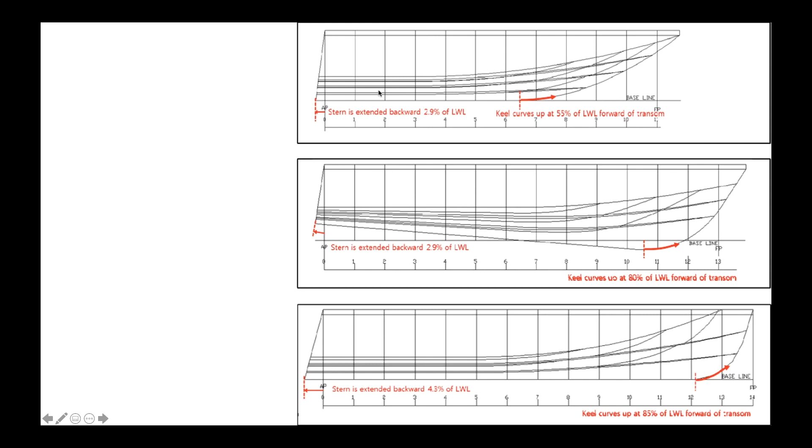Pictures like this are really inspiring, but not very helpful for our modelling purposes. Your typical hull shapes: displacement, semi-displacement, and planing hull. That's what I'm going for. This reference picture, the resolution isn't high enough, I don't think. You could use it, but there's also no front pictures.

This, I think, works really well. You've got a good perspective picture to give you a good idea of what's supposed to be going on. Good image from the front. These red lines here show what your bulkhead shape should be as it tapers along. Good view from the side and from the bottom. I'm not going to use this because I don't really want this continuously tapering line.

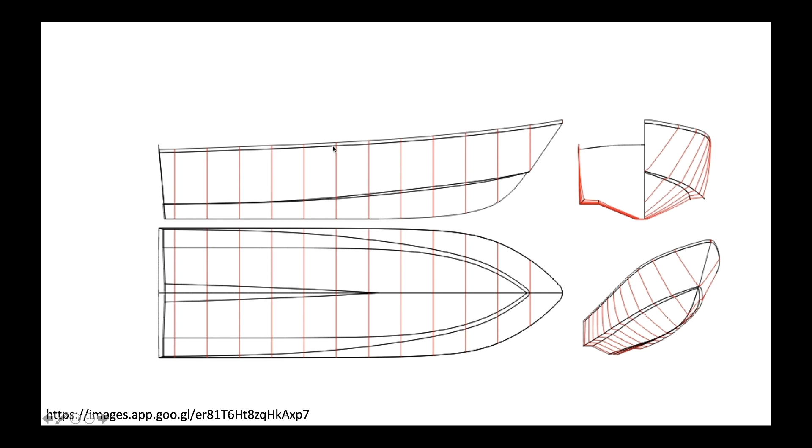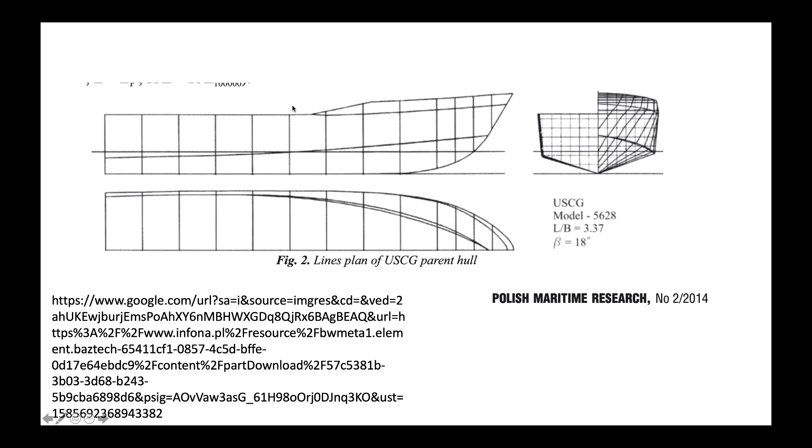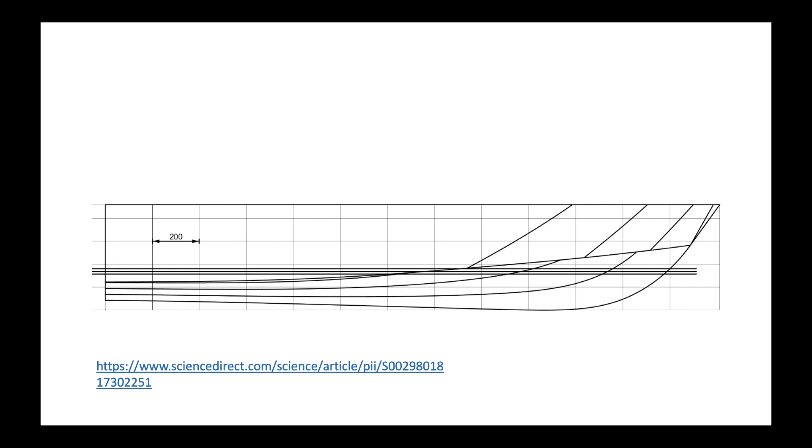So I'm going to use this view from the front and this view from the side. And you can see the link where I got these images from. This one is, I think, a White Pointer, but I'm not certain. I mainly had this for outboard positioning and for the hard top. The hard top is this cabin part up here. The rail on the side is also quite useful.

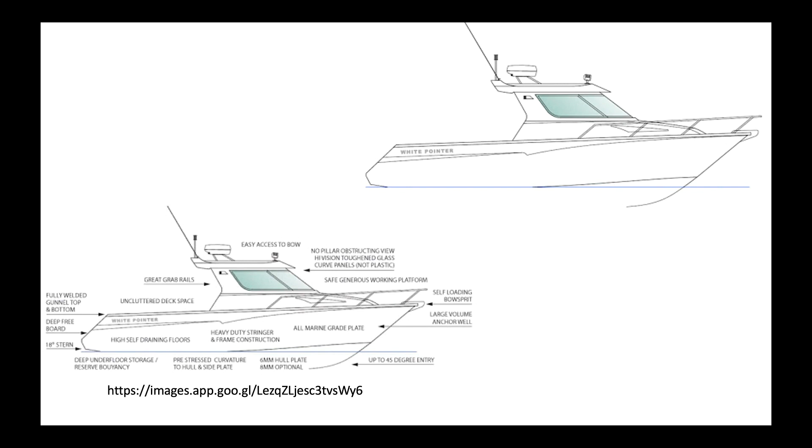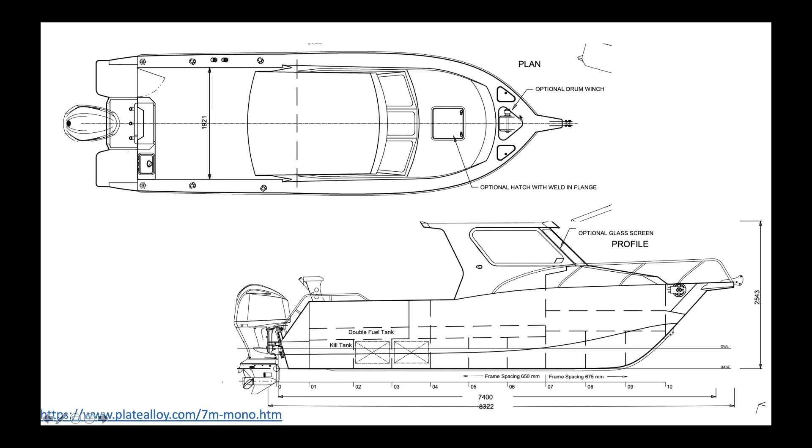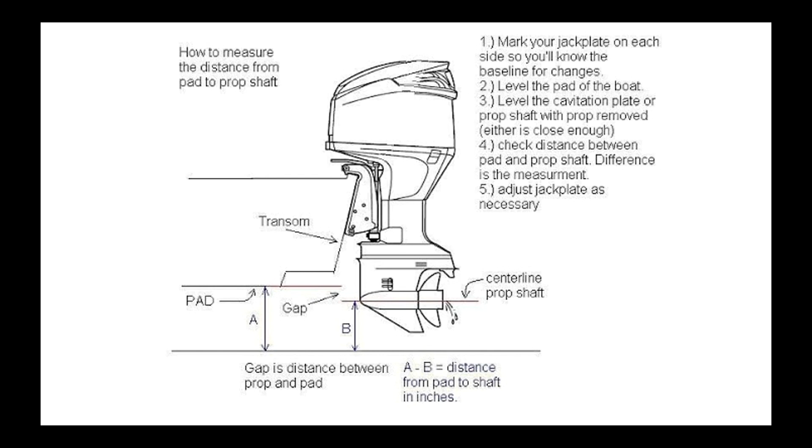This profile is more of a real outboard that I could model. They're quite challenging to get good topology, but I'll do my best a little later on. I found some pretty good images of some Yamaha motors, so that's why I've got Yamaha. No particular preference, they just happen to have good images.

So you've got to start by setting yourself up some decent folders. I've got one for documents, that's my PowerPoint that I showed reference pictures. These are my original models from my practice. Just make sure that you keep increasing the version number on the end, so you can keep track of everything. This is the folder where I'm going to save my models for the video so they don't get confused. Some reference pictures, and these are the reference pictures I'll be using for the boat that I'm making and the video recording. Here are some of my tracks so far.

So start off by getting rid of your default cube, and we're going to insert some reference pictures. Now I'm going to click over here, and what I want you to look at is the view. So that's right orthographic. If I click the Y axis, that's back orthographic, and left. I'm really looking for the front orthographic there, so the letter Y pointing at you. The 3D cursor is in the origin. Actually, it'd be quite sensible if I turned on my screencast keys. So down here you can see what I pushed last.

So if I go Shift A, you can now see what I pushed, and I'm going to come down to empty image. This image is sitting flat, almost like a piece of paper on a table pointing up to the ceiling, and this empty I'm going to rotate. So down the bottom here, if I have not modified anything, then I can just align it to my view. Next thing to do with this empty, if we come over to the properties panel, this green axis here is the empty. So I'm going to click open and navigate to my reference pictures for the video, but I want this front view here.

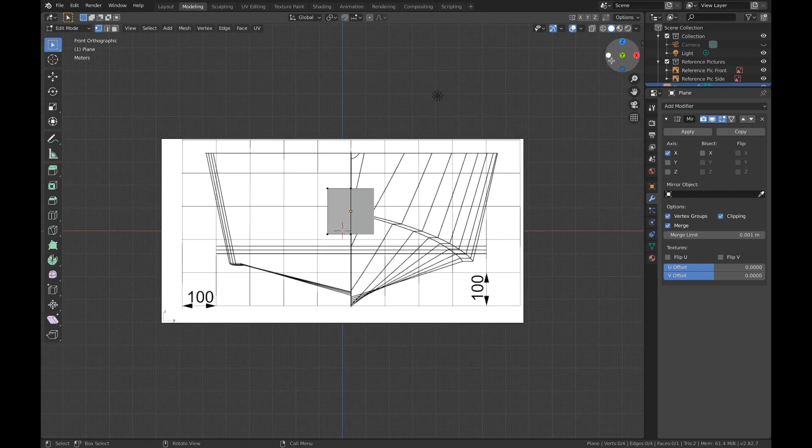I'm going to turn clipping on before I forget. Clipping means that I can't pull it apart like you just saw me do. So I'm going to grab that top section, modeling. I'm going to go into modeling. Seems to be bugging me slightly. So G, Z, pull that up to the top.

Grabbing this vertex here on the left, I'm going to go G, X, and that means that it's going to move out to the side. Now, I'm not certain, but I believe the transom is a little narrower and then it bulges out slightly, so this is the first point. So I'm going to double tap A.

Looks like my screencast keys have turned off. There they are, they're back again now. So I'm going to grab that vertex and grab it and pull it down. So if you see this line, I'm going to bring it down, down, down, and then eventually drop it there.

Now this one, I'm going to pull down to here, but what we can tell is I need a cut here. So I'm going to subdivide that, but I really would like to see through. So if we look up the top here, if I click this one here, if I hover over it, it says toggle X-ray. That means I can see through, which is really helpful for me.

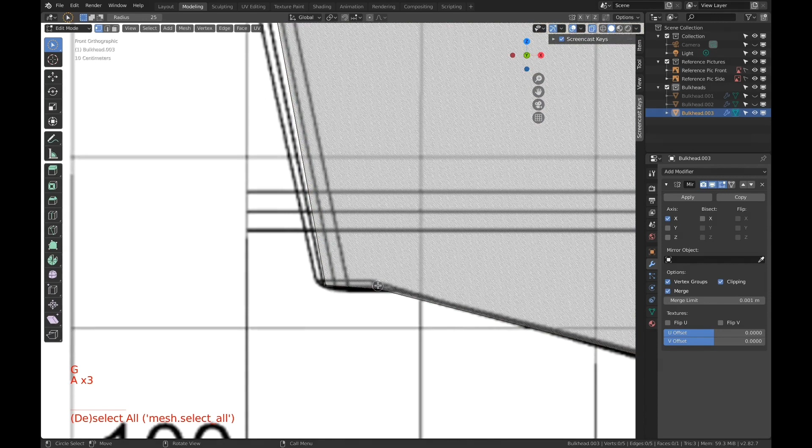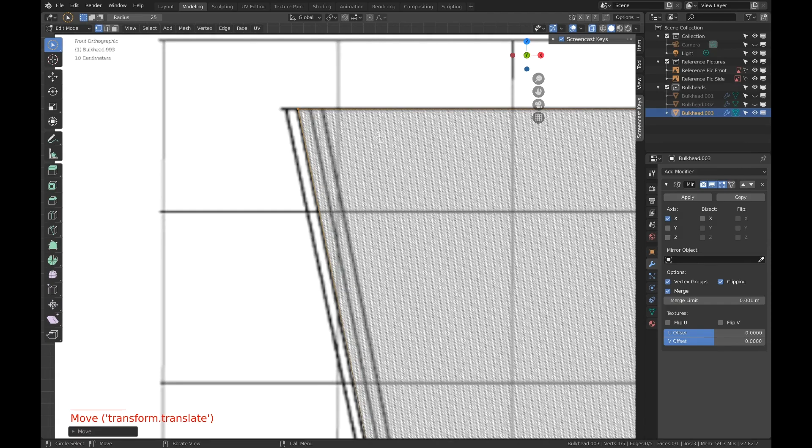Tab into edit mode, G for grab, pop that out, G for grab, G and Y so it doesn't... X, excuse me, X is sideways, and then again, GZ, pull that down, just a slight taper change.

Excellent. So I'm going to re-show each of these, and what's important to understand is the actual editable side is on the left at the moment. Now all the data I need is on the right over there, so I could either flip the reference image or spin, so I may just do that in object mode, take that bulkhead R, Z, and then type 180.

RZ 180. RZ 180. RZ 180, excuse me, 80. Tab into edit mode. And now what we can see is all of the editable parts are on the right hand side. So those are my bulkheads, and if I just change into a better lighting system it might help a little bit better. So I'm going to continue to model these bulkheads.

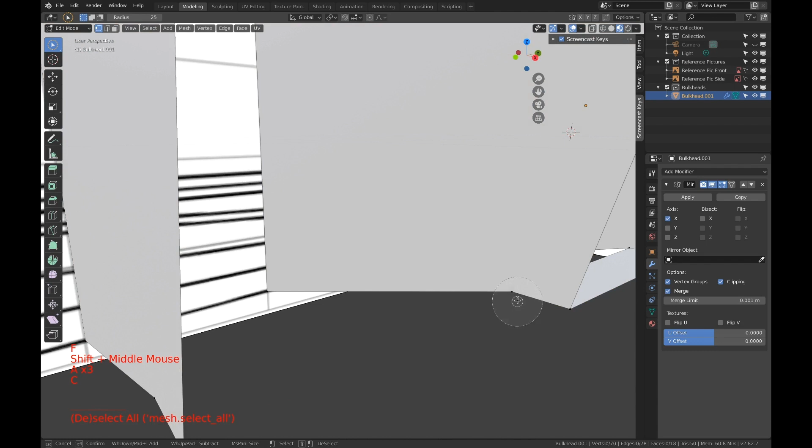Deselect, select the front, fill, deselect. Oh, must be missing that one. Fill.

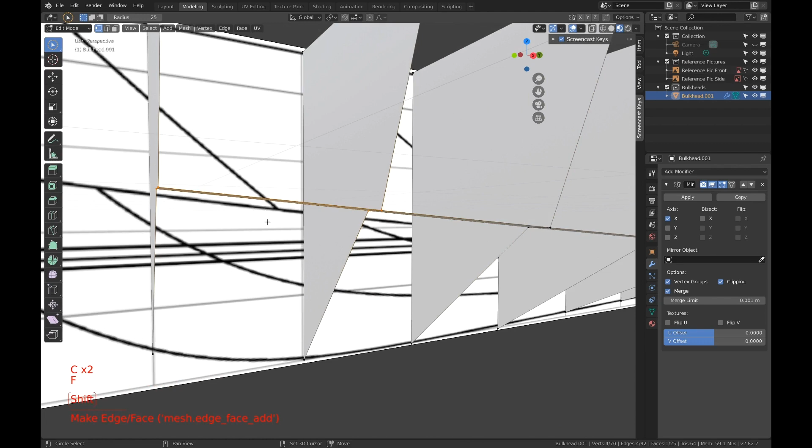So you can deselect by circle shift clicking, C for circle and shift clicking, and I've kept these ones so that I can make adjustments as necessary.

What you'll see from the side is I haven't quite got that one right, so I'm going to change the position of it. I'm going to go to wireframe to make sure I collect everything. I'm going to box select that, and I'm going to go GY, bring it backwards. There we go. So at least that tape is going to follow the front of the boat. Come out of wireframe. So I've popped the chine on the side there.

I'm just going to have to say ooh to that bit, getting really wide then not. So what I'm going to do is scale that, I think. And this left and right is the x-axis, scale x0, so that's a nice straight line.

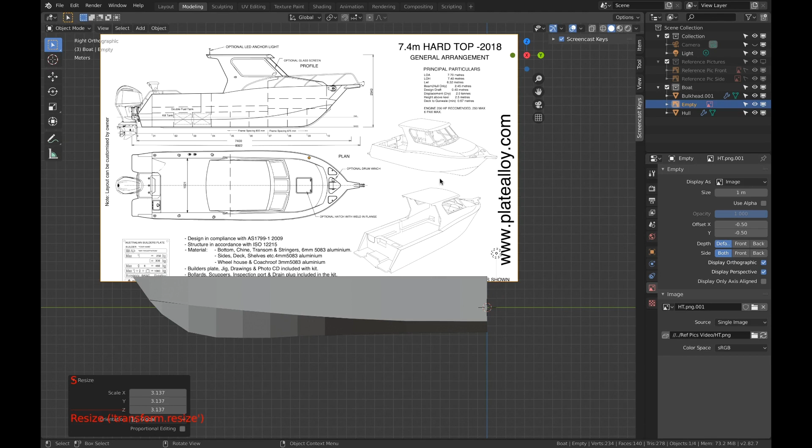I'm going to insert another reference picture, Shift A, empty image. Now that is aligned to view, so I'm going to bring it over here, scale it, make it bigger, and I'm going to open... not big enough, and it's pointing the wrong direction. So I'm going to rotate that in the z-axis 180, return. So I'm looking to make the end of my boat a little more like that. So I'm going to need to put a loop cut perhaps there and pull that section out.

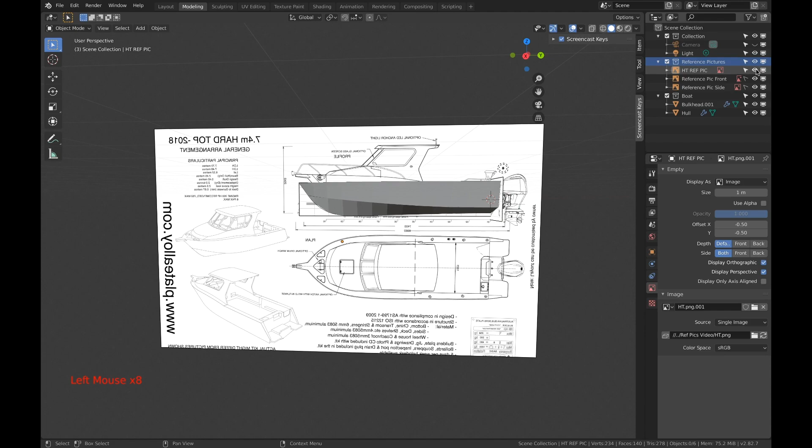I'm going to call it by its name. It's, what is it, a 7.4 meter hardtop from platealloy.com. And I need to put that in the reference picture folder. So looking side on, I'm going to apply a subdivision surface modifier to this. And what you'll notice is there's a whole lot of pulling away. It shrunk away from the bulkheads.

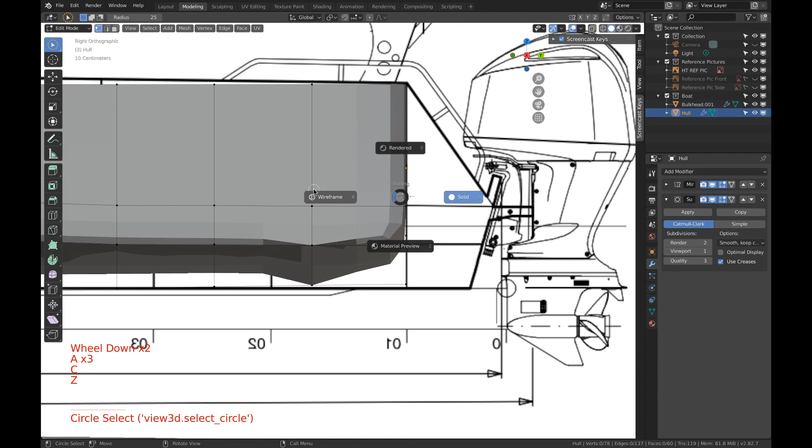We're going to put in some loop cuts. The first one being around, Control R for loop cut, edit mode, Control R, and pop that one down to here. Something strange going on here that needs investigation. I'm not entirely sure why that looks the way that it does. But anyway, looking from the side, I'll fix that later, I think. Z for wireframe. Box select that and pull G, Y, pull it out to the back. G, Y, bring that slightly forward.

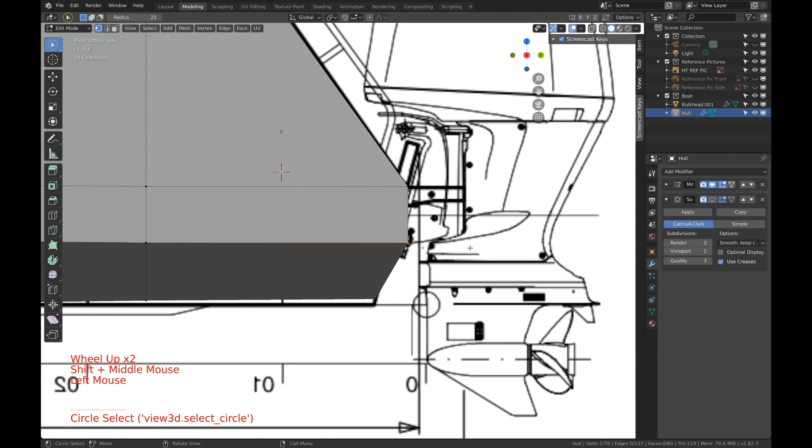So I got everything I needed, I think. That one is going to come up though. GZ, make that flat. Grab that one, G, Y. Give both of them. Probably need a cut across there. So now we've got a slightly better profile at the back. I'm going to need to put in some more loop cuts to essentially tighten everything up.

So Control R, and then as I hover over this line you'll see the yellow, basically asking you where do you want to cut. So if I put one here I can click and bring it up. Now if I push various different keys like E or F, essentially I get different loop cuts. I know I'm going to need one around the top. I'm also going to need one, Control R, loop cut this way, just in from the edge, and I'll need one Control R, loop cutting around here and just up.